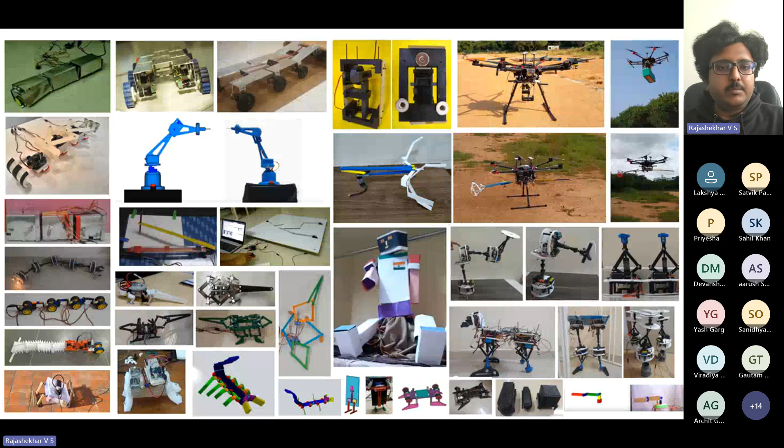These are a few robots which I have built in the past 10 years. This is the first robot I built as part of my bachelor's project. This is a snake robot capable of moving in a straight line and moving sideways.

This is a robot I built during my master's, which was 3D printed back in 2015 from TCS, and for this we have the US and Indian patents granted. So snake robots are my primary interest.

Apart from that, I work on aerial grippers for drones and also modular robots which can be reconfigured to form various forms. More interestingly, I work on robotic lizards, because snakes cannot climb walls, which can be tackled by using robotic lizards, which I feel is very important.

Instead of using a rover in many situations, I plan to use a robotic scorpion, which has the ability to go over rough terrain. We'll be discussing all these robots in today's session.

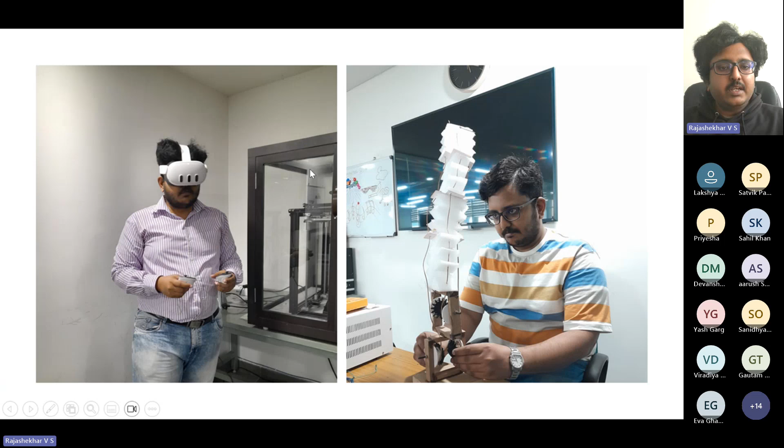During my PhD I'm focusing on VR, virtual reality, where I create an environment in which the robot performs its tasks. This robot, which you see on the right, is a soft continuum robot for which the virtual environment is being created in the VR headset.

This is the MetaQuest 3. In this headset, I'm trying to control the robot using the headset and the joint and hand controllers.

So what to expect in today's workshop? I'll briefly talk about robotics, basics of electronics, bio-inspiration - how you can take inspiration from biological creatures and create your own robots - usage of TRIZ, the art of problem solving, and creating GUI, graphical user interface, for robots.

I like to pause here and ask the audience to think for a minute and tell me which topic I can focus on more, so that you feel it would be useful for you. You can interact with me now. Which portion do you want me to focus on more, or are you interested in learning about all the topics with equal importance? You can unmute and talk.

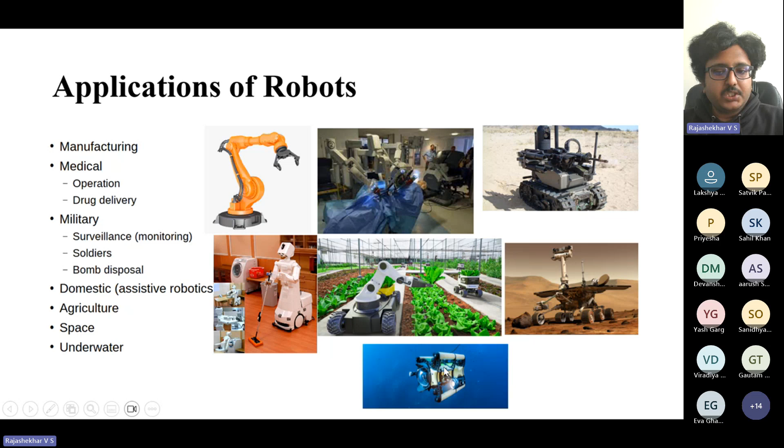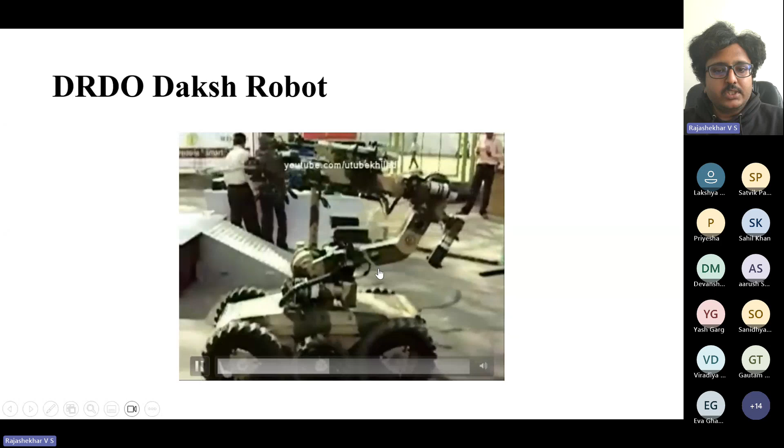Before going deeper, we will now see a robot created by our DRDO in India, called the Daksh robot, where you can see the graphical user interface and the robot being controlled. This robot is capable of identifying, scanning, and destroying suspected objects.

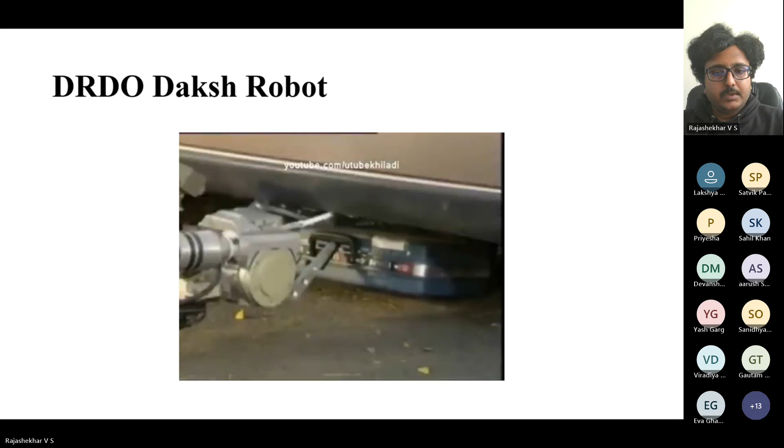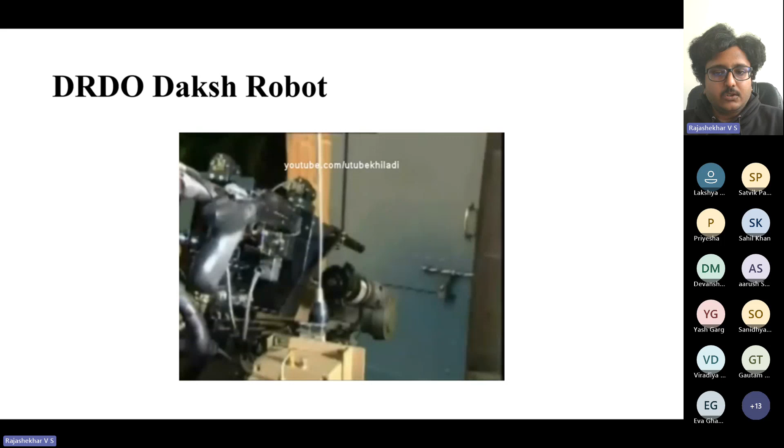You can see in this video, it is lifting up the suspected object, scanning it for any explosive inside, and then destroying it using the shotgun. It can also open doors which are locked.

This is the robot developed by our DRDO, Defense Research and Development Organization. And here is a robot developed by Fanuc, leader in robotic arms, where this industrial robot is being used at Audi - you can see the engine getting assembled.

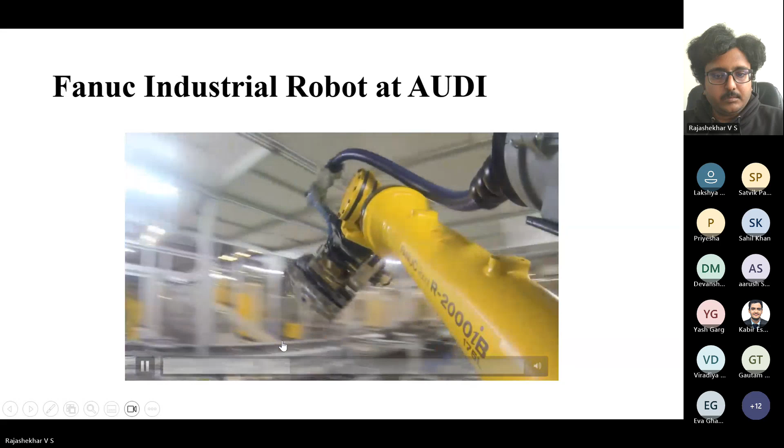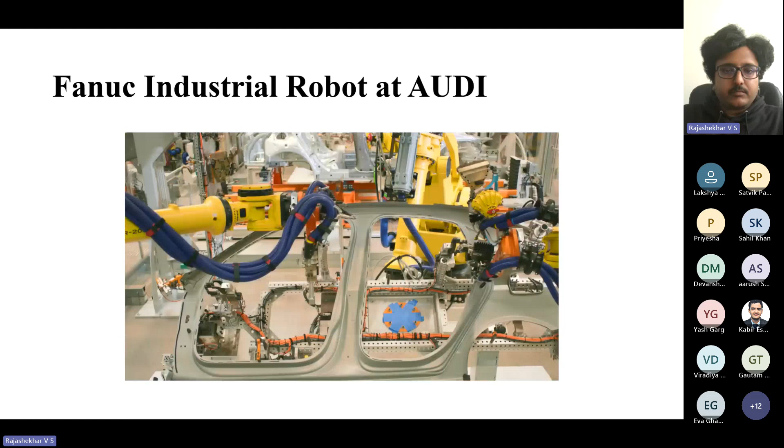So the first question everyone has when they start to explore robotics is, how can I start building robots which are complex in nature? For that, I would recommend an approach called fix, crawl, walk, and climb.

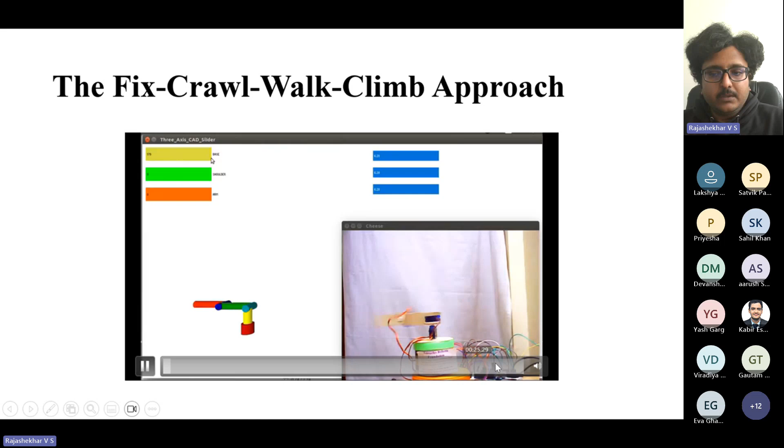In the fix stage, you try to make a simple manipulator using cardboard and locally available servo motors. You can see this video. You can make a manipulator first, then go for a crawling robot, and then a robot which walks using legs on a floor.

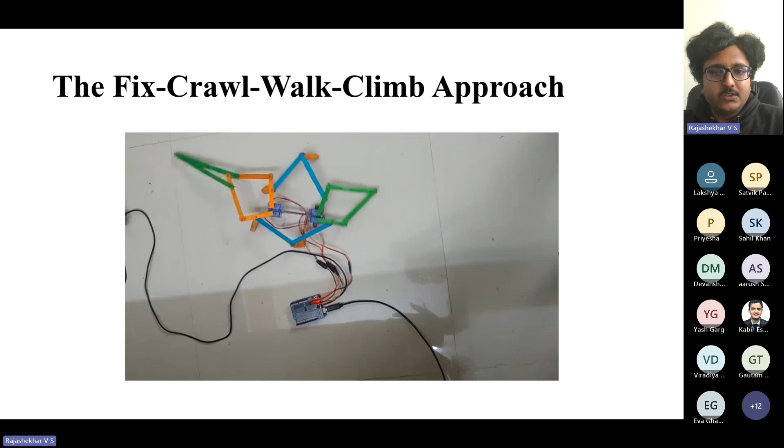Once you get command over this, you can go for a robot which can climb up stairs. This fix, crawl, walk, and climb approach lets you create more robots with confidence, because you learn stage by stage, and mistakes from the previous stage won't be repeated in later stages. So now I'll show you a robotic arm.

This is an example of an open loop system. Here you start with the base, shoulder, arm, and finger, but this is not connected to any part of the body, so it's called an open loop system.

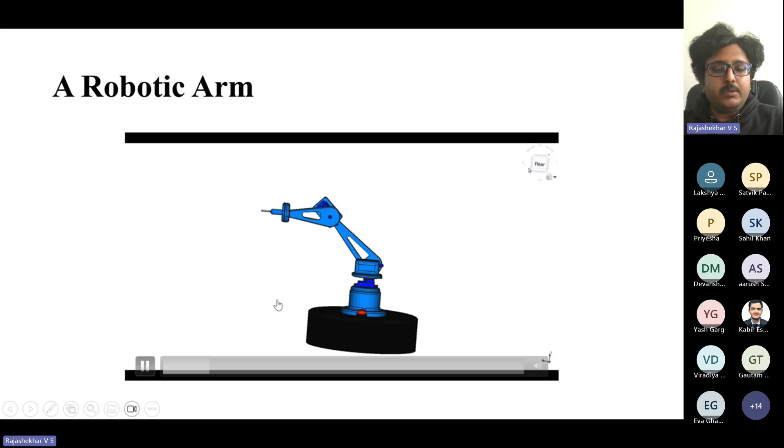This robot is a simple three-axis robot which I created for educational purposes. You can download the 3D model and try 3D printing it in your own lab, and try making the robot on your own.

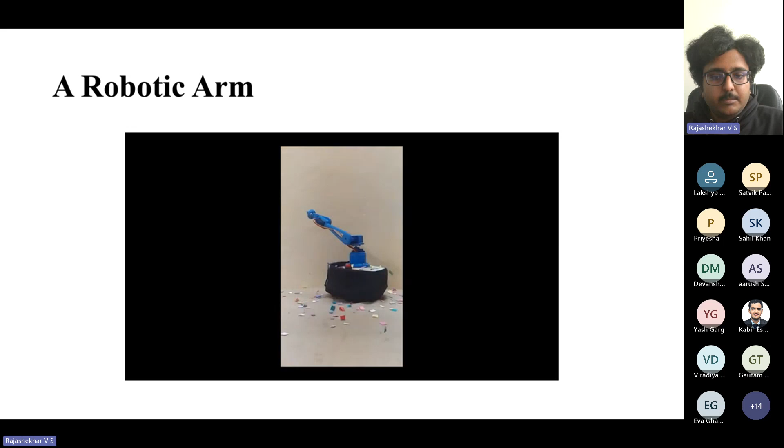It's trying to pop a balloon with the pin that's attached to it. It successfully popped the balloon. This can also be used to lift very light objects, like a few grams, and this is how you can see it.

Here is another robot which follows a closed loop mechanism. This is a mobile robot inspired by a gecko. You can see the green portion, like a parallelogram - it's a 5-bar mechanism, 1, 2, 3, 4, and the base is the 5th, all connected together.

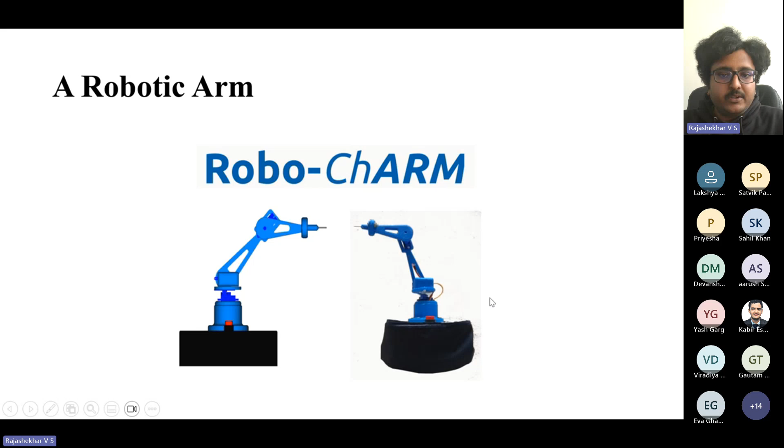So if you see this kind of robot, this is a closed loop mechanism. In robotics, there are either open loop mechanisms like the first one or closed loop mechanisms like this. You have to define which category the robot you are designing falls under.

So what is an open loop mechanism and what is a closed loop mechanism? We can try to understand it with a better example. Everyone should have come across playing TT, that is table tennis, and everyone would have seen people playing cricket. The big difference between these two sports compared to open loop and closed loop mechanisms is relevant here.

The player in TT uses only one hand to hit the ball back, but in cricket, the player uses two hands. So there's a closed loop formed in cricket, whereas in TT there's only a serial arm being used to play the game. The force and torque applied is very less in TT, but in closed loop mechanisms like cricket, the torque and force needed is more, which we get using closed loop mechanisms.

So if you have any doubt till now, you can ask me.

What is the difference between closed loop and open loop mechanisms in terms of error? Let's say in a closed loop mechanism, one link has bent due to application of force or due to aging - this accuracy is lost in a closed loop mechanism. But this can be substituted by using various techniques, like rotating the pivot point, O1.

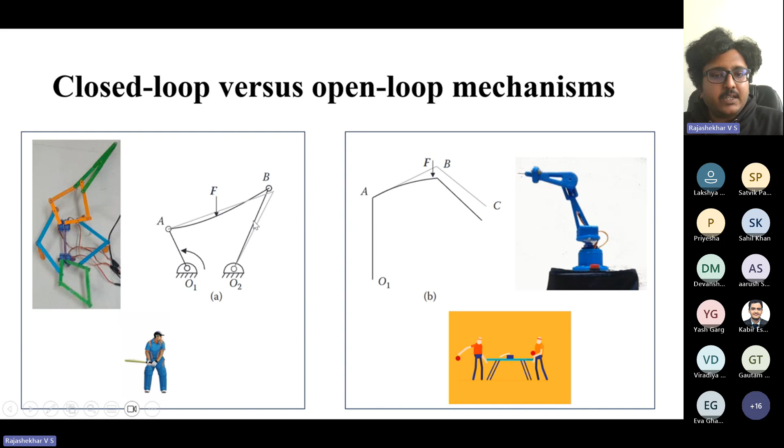But in a serial mechanism, if a force is applied and the arm is bent, this can still be corrected using closed loop control systems, and it can reach the point where it needs to go. So this correction is available in open loop mechanisms, but in closed loop mechanisms, the error correction is little tedious.

Now we'll go into the basics of electronics. So has anyone worked on Arduino before? Or should I explain it - okay, I see some hands raised up. So should I talk about Arduinos?

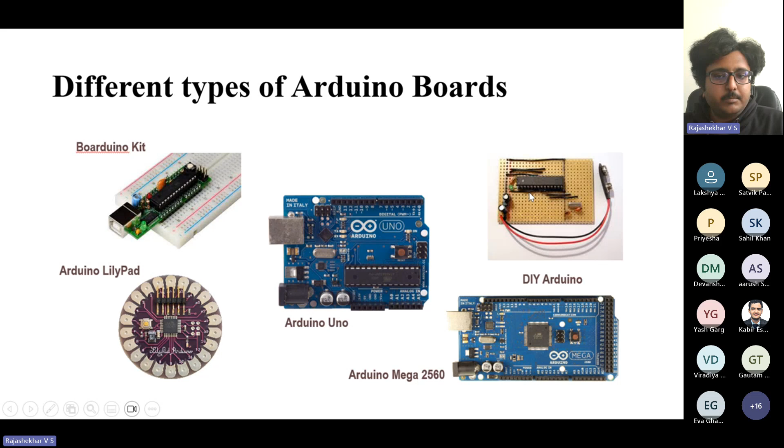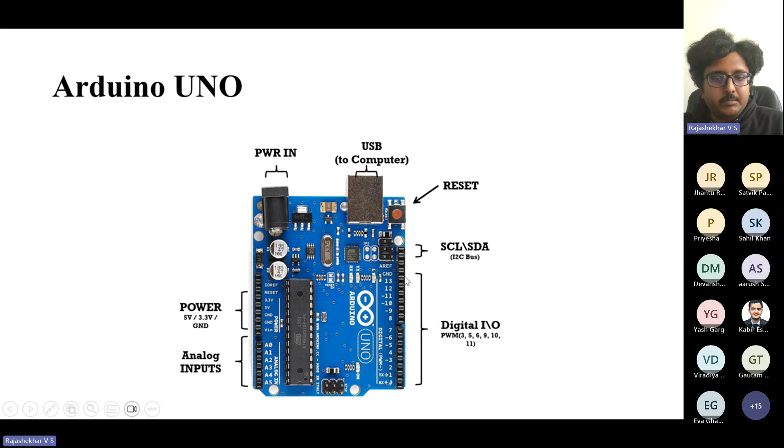Arduino UNO has a USB port, and these are the components of the board. This portion is where the USB from the computer connects to the UART, and this is the power-in port used when the board is in autonomous mode, not connected to the computer. There's a reset button, an I2C bus, 14 digital input-output pins, a power supply section, and analog inputs from sensors.

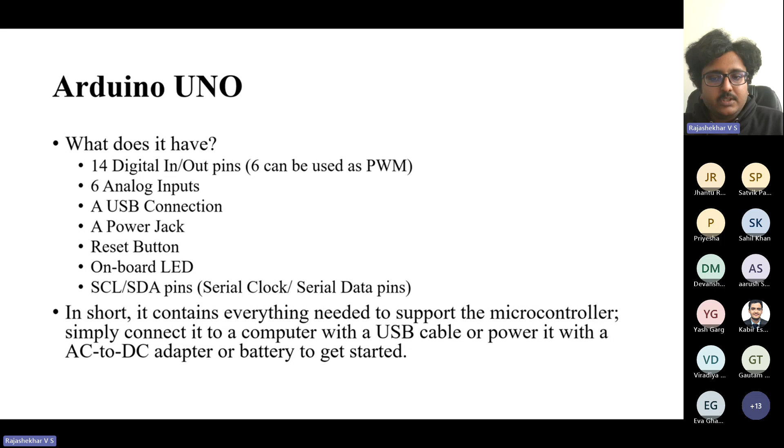So these are the features available in Arduino. In short, it contains everything needed to support a microcontroller. You just simply need to connect it to the computer using a USB cable, or power it with an AC to DC adapter or a battery to get started.

I hope everyone is using a laptop now, so we'll do some hands-on experience. Although if you have the hardware it's well and good, if you don't have the hardware, don't worry. We'll be using an LED, a resistor, a servo motor, a few jumper wires, and an Arduino board.

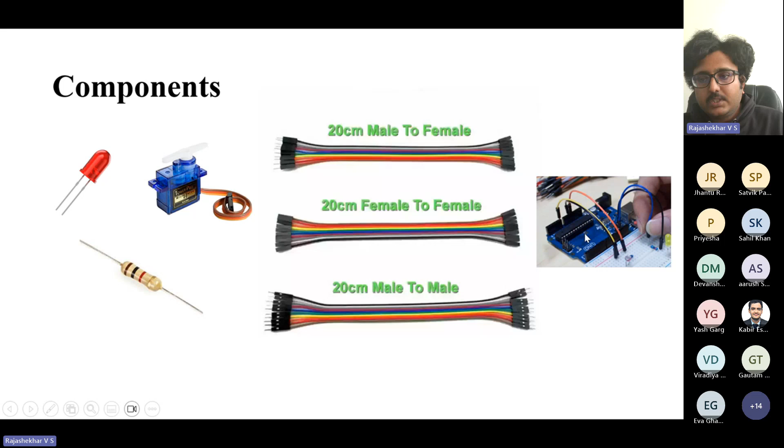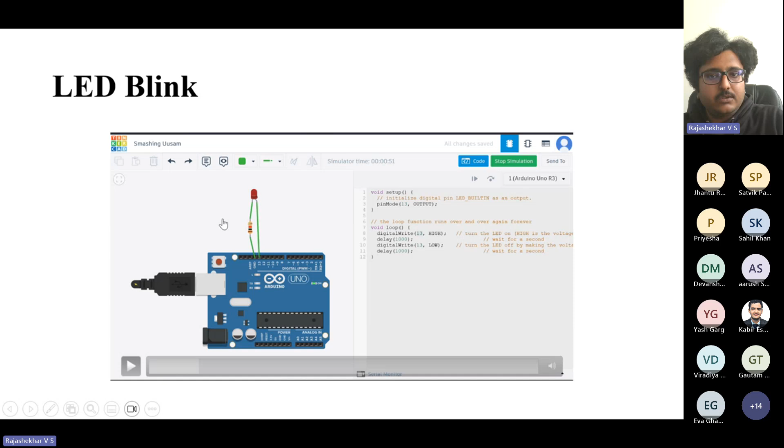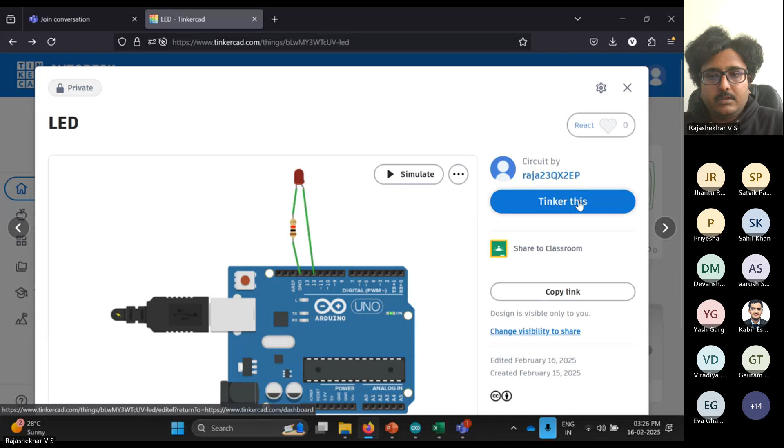This is how the jumper wires are connected to the Arduino board and the breadboard. The first experiment will use Tinkercad for this. I request everyone to open Tinkercad if you're using a desktop. Are you following?

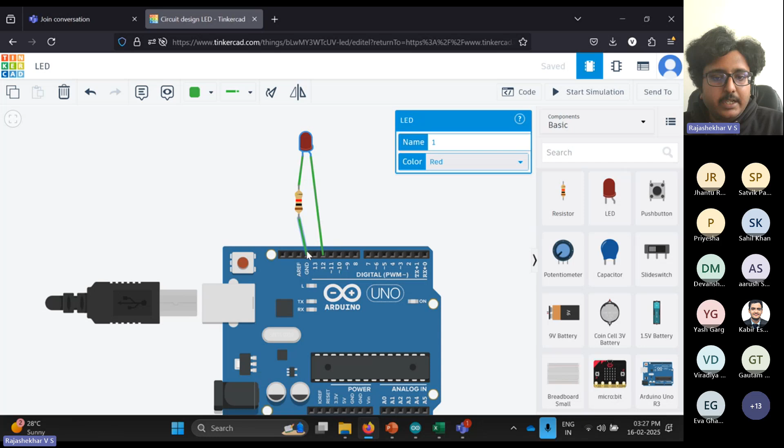Yes sir, okay. So this is a simple circuit where we are trying to blink the LED. The LED is connected to pin number 12, and the ground of the LED is connected to the ground through a resistor. So there's a code over here.

The advantage of using Tinkercad is that you have three options: either you can code using the blocks which are already available, if you're comfortable with block-based coding, or you can use block plus text coding, or you can use text coding, whichever you are comfortable with.

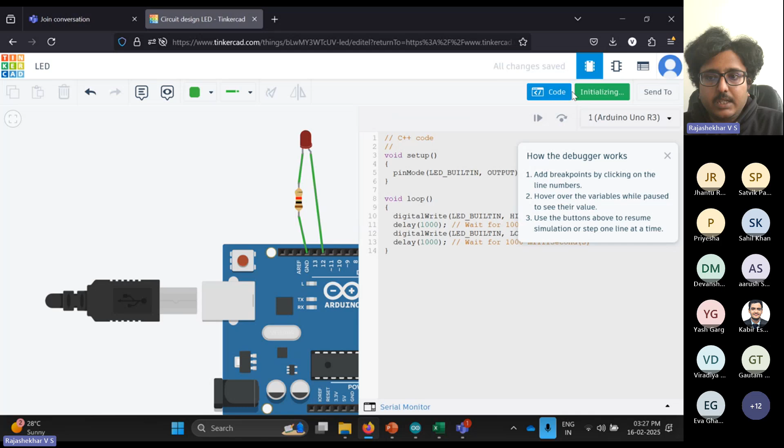If I click on start simulation, nothing will happen. The LED won't blink because it's connected to pin number 12 but not set up yet. So you just need to change the pin number to 12 over here and now start running the LED. So for 1 second it will blink, the other second it will stop. I hope you're able to see it.

If you want it to be high for 2 seconds, this value is in milliseconds, so you can give 2000 milliseconds and make it blink on for 2 seconds, off for 1 second, on for 2 seconds, off for 1 second. So this is one example.

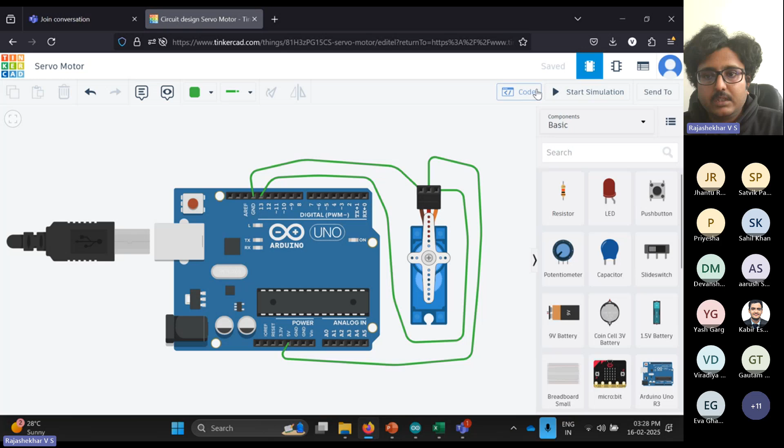Next example, we'll see the servo motor. I hope everyone knows what a servo motor is, and this is a common servo motor available in the market. In this, we are using two for loops, and before that we are attaching it to pin number 13, the servo motor, and the position is changed.

The position changes from 0 to 180 and 180 back to 0, and there is a 15 millisecond delay between each angle adjustment so that physically the object can move. So if you start the servo motor, it sweeps. It's basically a sweep program.

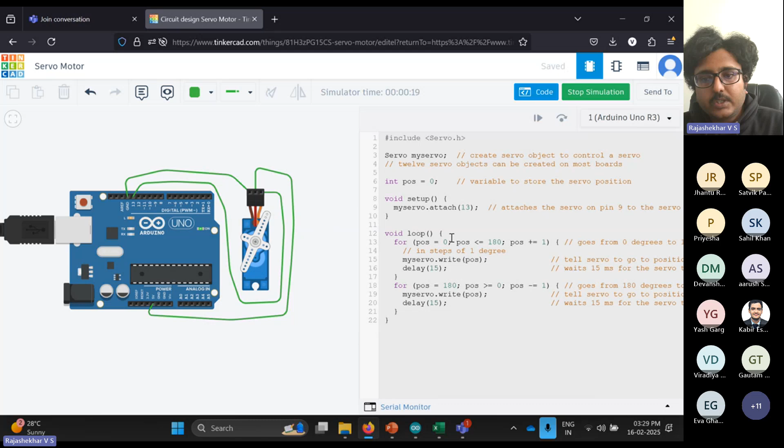So when you get out of the workshop, you can actually try to use the Arduino, servo motor and jumper wires to make the circuit like this, and type the code which is already available in the sketchbook, and you can run the simulation. In the sketchbook, under file examples, servo and sweep, this code will open, and you can try to upload it. You can verify it and upload it into the Arduino by connecting it to the system.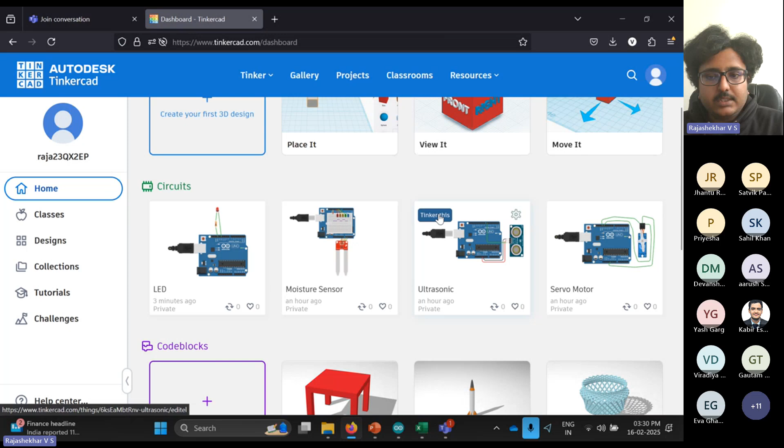So next we will see a sensor. Since we have had a look at the servo motor and the LED, we will have a look at a sensor.

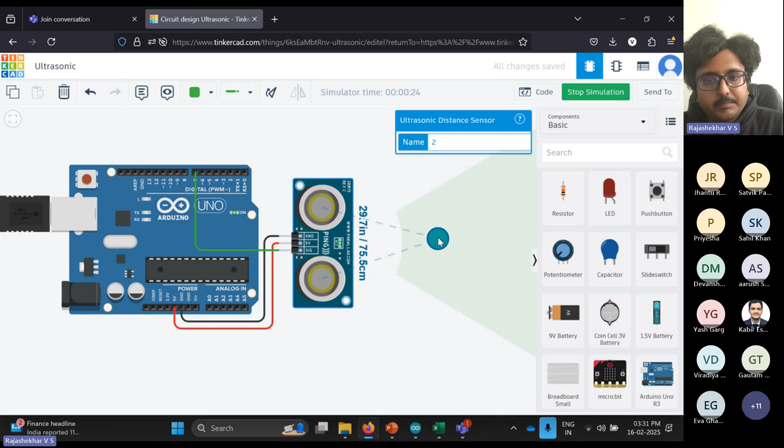This is a sensor called an ultrasonic sensor. The code for this you can view in the code section. What I'm trying to show you is you just need to click on the sensor and it will tell you it is 29.7 inches away, that is 75.5 centimeters away. If you move the object in front of it, this sensor will send rays, hit the object, and it will come back, so it will tell at what level it is away from the sensor, away from the object. So this is how the sensor works.

Okay, so I'm going back to... So apart from Arduino, there are various other boards which are available.

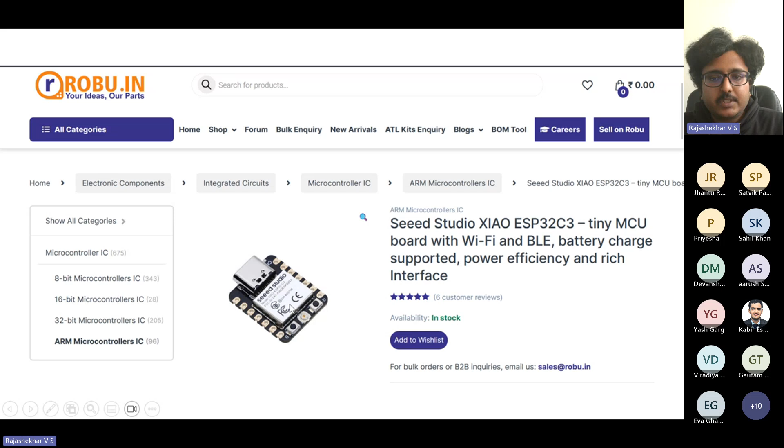Okay, we'll move to the next section of the talk. Before that, if you have any doubts till now, you can ask.

Bio-inspired robotics. Why do we need bio-inspiration in the first place? Can anyone tell? Because this is the future. Okay, very good.

Some other views? So the world is made for humans. If we can make the robots humanlike as well, they can access all the things that we have. Okay, very good.

The biomimicking is a very important aspect because of one main reason: we all came from nature, and we took inspiration from nature over the past millions of years, and that is why we are able to create something that is helpful for us.

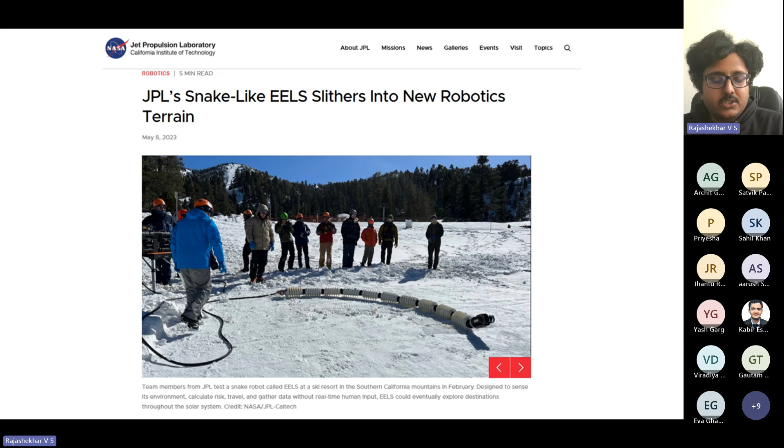And that is what all the space agencies seem to be doing, because the European Space Agency has also asked European countries to work on snake robots, and NASA is also working on snake robots.

And for balancing, it can use the tail which it has. This tail can have 3 degrees of freedom, so that it can be changed to cater to the need of the locomotion.

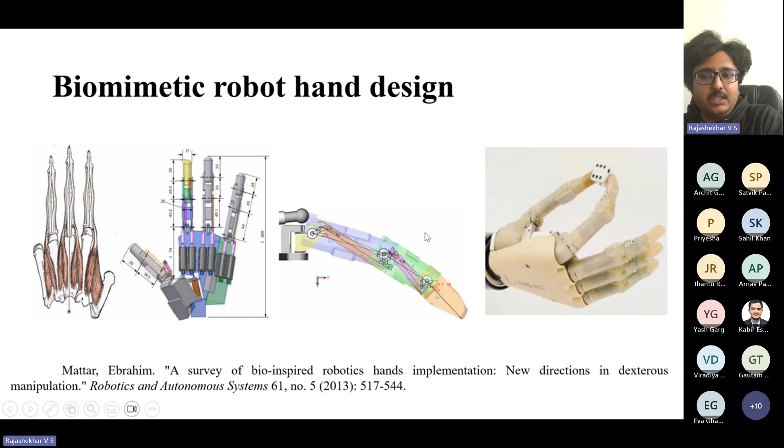So the difference between these four creatures which I chose: this hand is needed for people, humans, basically, to pick and place. This robo is capable of doing anything on land and underwater also - underwater snake robots are also available. And the robotic scorpion can replace a rover. And this fish can go underwater and search for pollution and other coral reef studies and aquatic life underwater, it can study.

And this robotic lizard has the capacity to climb on walls. So using pressure sensitive adhesives, this is possible to make it climb on walls.

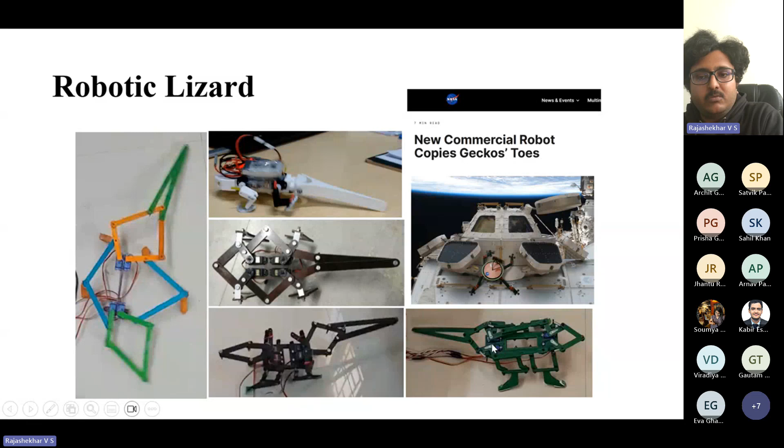So coming to the question of how to build bio-inspired robots. First, choose the application. In this case, there is an application where it has to climb up a wall on the side of a road. This can be for any purpose, but I'm not focusing on the purpose now. We just want a robot to go from here to there. You can do it using a drone as well, but we are trying to use the land way.

So that it is more effective and requires less control system dynamics. After choosing the application, we need to look out for animals that can perform the chosen task. You can look into an encyclopedia on animals to get an idea of what kind of creature is best suited. Then after choosing this, you can try to mimic the mechanism close to the animal. So here is a lizard. I tried to map the mechanism on top of it so that I can create a similar structure, add the robo components, and build a bio-inspired robot which can walk on the wall.

Okay, so far, if you have any doubts, you can feel free to ask.

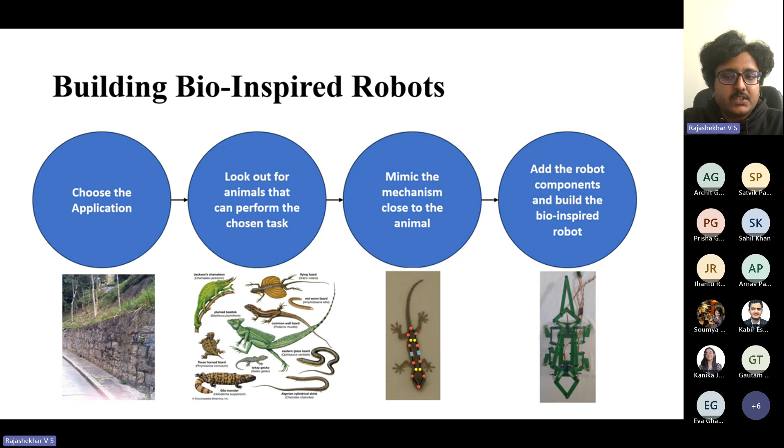So what we found here was a bio-inspired solution, where we try to mimic creatures in biology. But in TRIZ, we are going to use engineering principles to solve the problem. TRIZ argues that all the world's engineering problems could be solved in just 40 ways. Millions of patents were analyzed using this tool, and it is a well-established theory.

So the TRIZ method is as follows: understand the problem as a system, locate the conflicts, identify principles from the matrices, and systematically explore the solution. TRIZ has 40 inventive principles, starting from segmentation. Segmentation is dividing the product or end product into pieces. For example, a train is the best example for segmentation - instead of having a single long cuboid and calling it a train, we have multiple cuboids assembled in series, so it can solve a lot of problems which otherwise could not be possible.

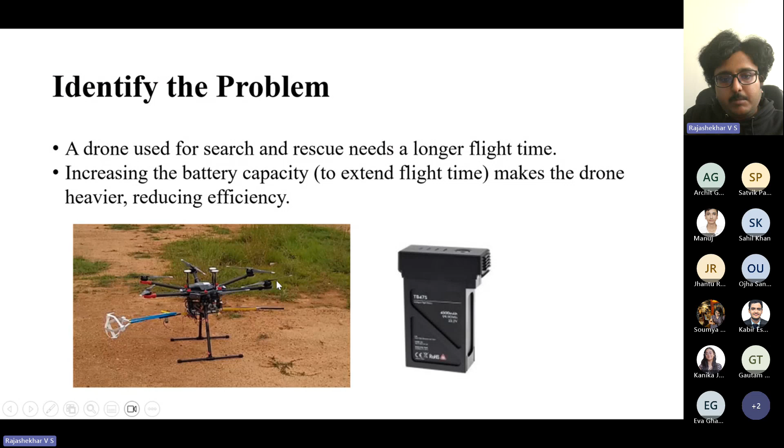As you can see here, this is a Matrice 600 drone which we worked on, and this is a battery which is fed into each of the six arms, so that it powers the blade, which is the propeller attached to it.

Defining the contradiction: increasing the battery capacity improves the flight, but worsens the weight and maneuverability. The physical contradiction: the drone's battery should be lightweight for better flight, but also heavy to provide longer power. The improving parameter we want to enhance is the 19th parameter, energy spent by a moving object — we want the drone to consume less energy and have a longer battery life.

But the worsening parameters, we have two: what is negatively affected is the weight of the moving object. Adding a large battery increases the weight, making the drone less efficient, and the speed — a heavier drone might be slow and less maneuverable.

Mapping these parameters to the contradiction matrix, we get these TRIZ principles: the energy spent by a moving object versus weight of the moving object, that is 19 versus 1 and 19 versus 9 — moving object, energy spent by the moving object, and weight of the moving object.

Principle number 35, which is parameter changes we need to make. Principle number 2, taking out something. And principle number 28, replacement of a mechanical system. So these three should be done.

And the energy spent by a moving object versus speed, parameter changes has to be made. Principle number 28, that is replacement of a mechanical system. So these two are common, the parameter changes and replacement of a mechanical system.

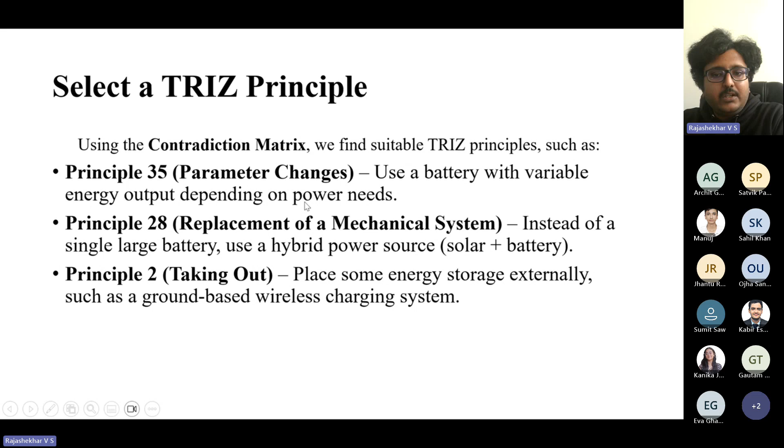If we apply all these principles using the contradiction matrix, we find suitable TRIZ principles such as using a battery with variable energy output depending on power needs, or instead of going for a single large battery, using a hybrid power source, that is solar plus battery, or taking out — if you want to replace something, place some energy stored externally, such as a ground-based wireless charging system. By doing these three things, we can try to solve the problem which we found earlier.

Has everyone understood? This is the part of TRIZ for robotics. If you have any doubts, you can feel free to ask me.